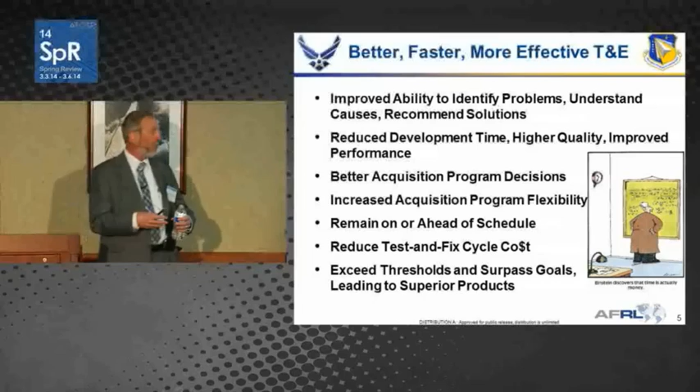The portfolio is mostly STTRs, and those are designed for tech transition. I do have a good number of lab tasks, but I have very little core university basic research money in the portfolio, and that is an organizational strategy. It's not my individual preference, but I think it's very effective for this portfolio.

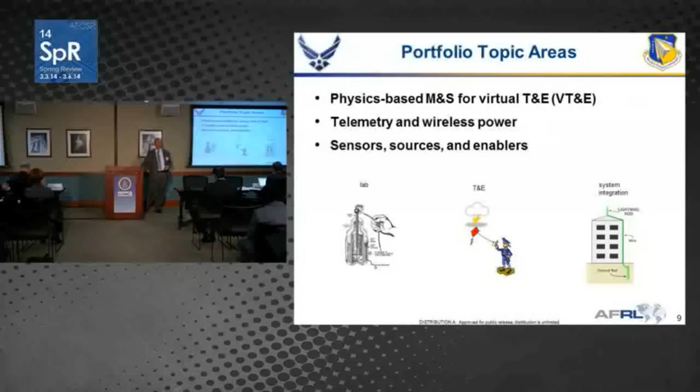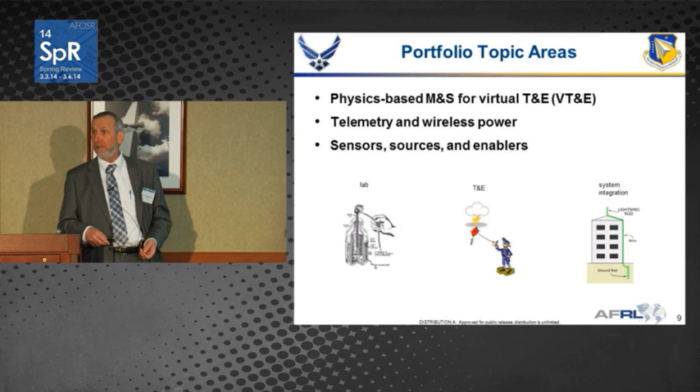Telemetry and wireless power is not a large area of investment, but it's a very important area. When we have for ground tests those big pieces of equipment, the test facilities being operated, that information needs to flow into a control room. We have safety issues and concerns - can the test proceed? If we take that into flight test, we have both the aircraft and the pilot safety that may be involved. So that information has to get from wherever the test is being conducted to a control room where they're making decisions in real time, and there's where the telemetry comes into play.

And this third area, sensors, sources, and enablers. Let me dissect that a little bit, because everyone knows what a sensor is, but I have two different types of sensors that affect my community. One is the sensor that is used for the test, but sometimes the product under development that comes in for testing also has sensors. In cases like that, those sensors sometimes come into the T&E facility to be calibrated, so I need calibration sources. Sometimes they come in for more complicated integrated testing, like hardware in the loop for, say, an infrared focal plane - I need a scene generator, and that's a source. I need to stimulate that sensor in the right way. And finally, the enabler. The enablers are kind of a catch-all, but as an example, the ultra-high performance concrete, that big block, it's not an instrument, it's not a model, but the test can't be conducted without it, and it's a critical part of that process.

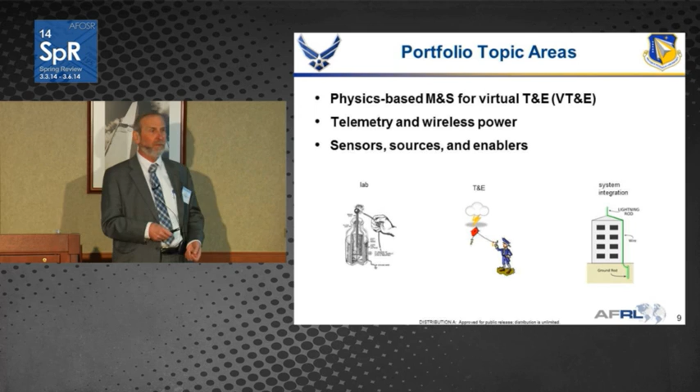Next slide. So in the area of physics-based modeling and simulation, current project areas - I'm going to highlight the virtual flight models that are under development, but there are several other areas here. I'll probably say a little bit about the high-performance computing, especially as it relates to computational fluid dynamics. Next slide.

Now, in the team building process, the PIs play a critical role, and here is a lot of the stuff that's happening in terms of the team constructions for the virtual flight software under development. It involves different people, different organizations, all working together. You'll see I also added some of the things I mentioned from the BAA that come into play: Summer Faculty Fellowship, the SMART program, and I'll show similar slides for the other two areas later. There are other minor parts that are extremely important for building up the T&E infrastructure for this program. I make use of all of these things.

Some of the work I'd like to highlight before I move on: this area is fairly broad because it involves different disciplines and different concerns, validation, different sources of test data, and different disciplines I could identify. I'd like to point out that in presentation and publication, all the people named here are publishing frequently in journals and going to conferences presenting their work. The research is not limited to just AFRL in this endeavor. All of the people are actively engaged in the research and in the publication process.

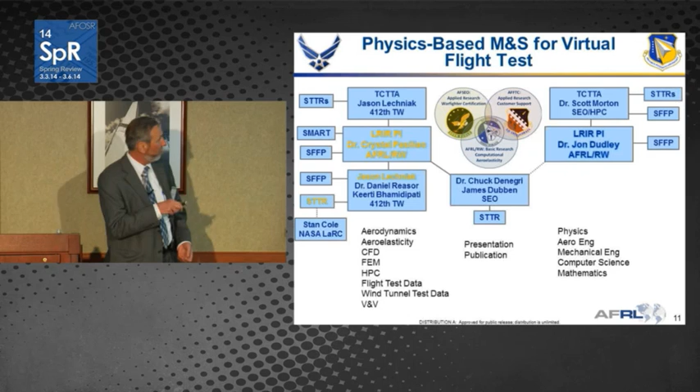In particular, Jason Lechniak, who works at Edwards, the test wing. Edwards has not only access to the flight data, but they have expertise in this area for model development. Jason is working as the tech transition advisor for Dr. Crystal Pasiliao at the Munitions Directorate, RW, at Eglin in this regard. I'll be saying more about this activity shortly.

Next slide. Okay, so here's what Dr. Pasiliao is working on. It's this complicated problem of flow interaction. It's a combination of a flexible aircraft structure that needs to be modeled, the flow around that structure, and how that structure interacts with that flow.

You'd think that this would be solved once and for all, but it's not, because when the aircraft is first designed, a prototype is put into testing, that's all nice and fine, and then someone says, oh, we're going to have all these external stores, and the aircraft gets into the fleet. Throughout its life cycle, these stores are being modified, so things change, and what we don't want to have happen is the airplanes flapping like that. Those things aren't supposed to happen, but it's because of this nonlinear interaction between a structure and a flow. It's a tough problem that she's working on.

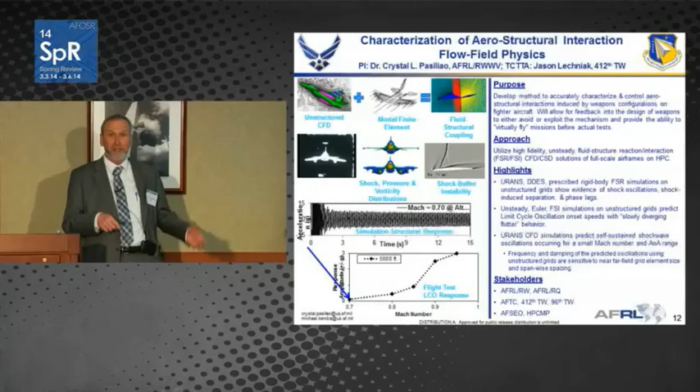Now, regarding the role, Jason and some of the people in the group he works in are actually getting some of that money to do the technical work. When we were talking about where else we need to invest, what new STTR topics, he said one of the problems we have is when we compare flight test data for something like this with what our best model gives us, we have differences we can't explain. We don't know whether those differences have to do with sensor placement and calibration, variations in local conditions like winds we don't know about, whether it's the finite element model that needs improvement for the structure, or the computational fluid dynamics model. We don't know what we need to tackle. All we know is that we have a discrepancy. And the flight data won't help us answer that.

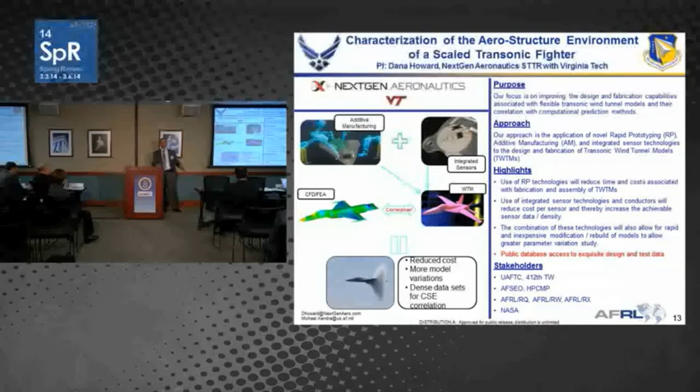Next slide. So we crafted a topic asking what we could do with phase 1, phase 2 STTR, and thought maybe we could take it into a wind tunnel test model construction, but bring in modern things like additive manufacturing and integrated sensors. The prize here is not the model, the prize is the data. We put in a requirement that any of the test data, including the design, be put into the public domain, so that people doing model development would have access to it, and the community would be served and the science would be advanced. Next slide.

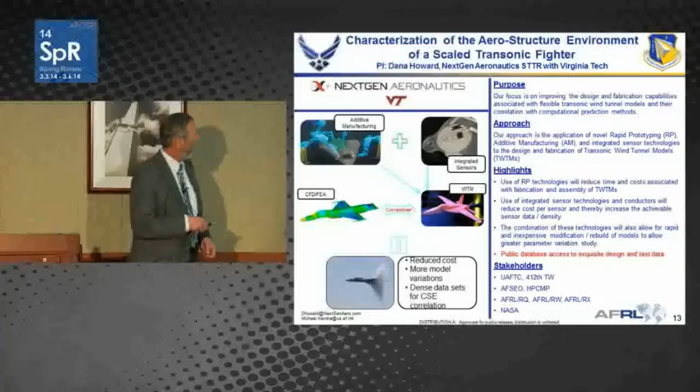Reduced order models—Doug Smith, when he was talking about flow and dynamics, said something very interesting. One of his PIs came up with a formulation where the computational complexity was greatly reduced. There was a simpler way to get at the answer that didn't require those resources. That's what the reduced order model paradigm is. So we're investing in that area as well.

Computational efficiency. We can build bigger supercomputers, faster supercomputers, better supercomputers, but it's expensive. Some of the performance bottlenecks are with algorithms developed for old hardware, 10, 15, 20 years ago—what we may call legacy code, but they're still in use. We need to identify those bottlenecks and get better performance by finding ways of removing or reducing those issues.

So we have STTR Phase 2, we actually did 2 awards here. This one specifically looks at the algorithm portion.

Each of these 2 areas of investigation, we're seeing not small percentages—we're seeing the potential for speedup by a factor of 5 to 10 in some cases. So this is a big deal for the computational people to get those tools working efficiently and keep them working efficiently.

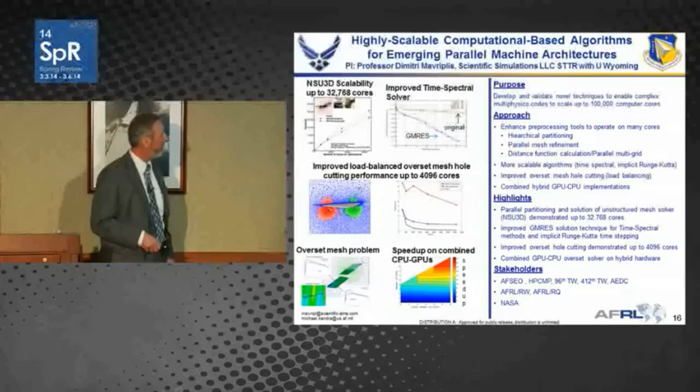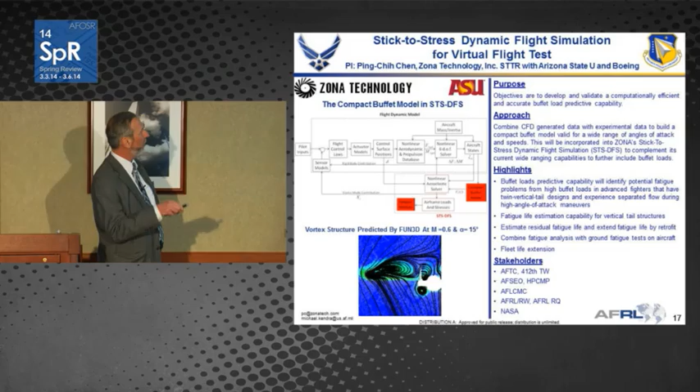Virtual flight test—we have 2 Phase 2 awards in this area, and for very good reason, the same topic. This one looks at the interaction of the control system and is developing that aspect of flight test modeling.

And the second award is looking at the reduced order models for virtual flight test. How can we come to the computational solutions quickly and efficiently?

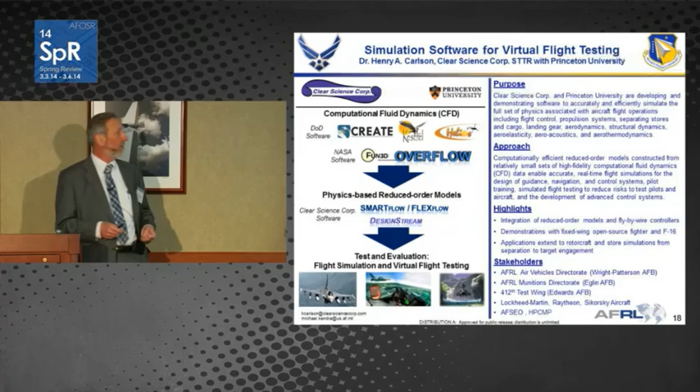This is a lab task out of the Sensors Directorate, maybe a little bit looking further down the road for hypersonics. What happens with the transmission of electromagnetic radiation through a boundary layer and plasma? And we're not just looking at RF, we're looking at optical signals and anything related to that. And that is Dr. Saba Mudaliar working with Dr. Charles Jones at Edwards.

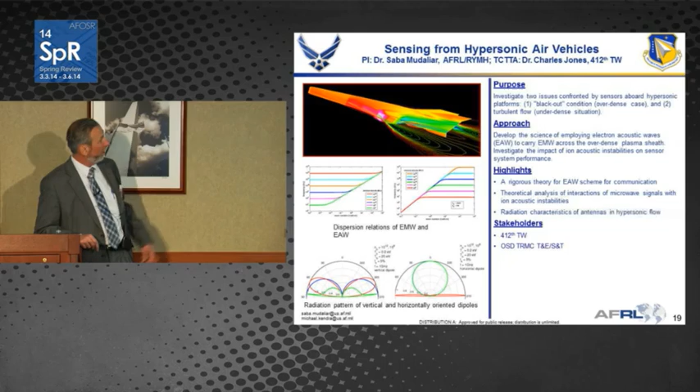A related topic, weakly ionized plasmas—this is a Phase 2 STTR that has just come to completion.

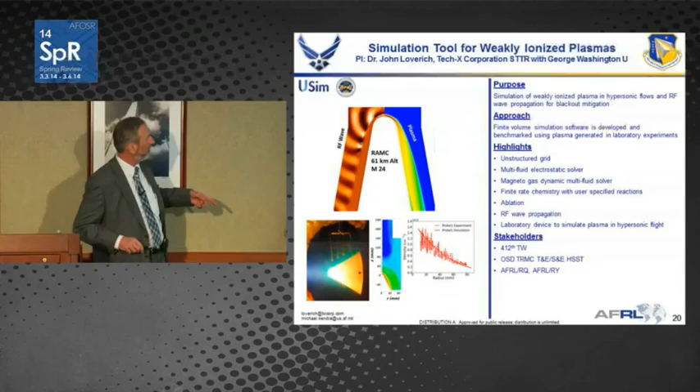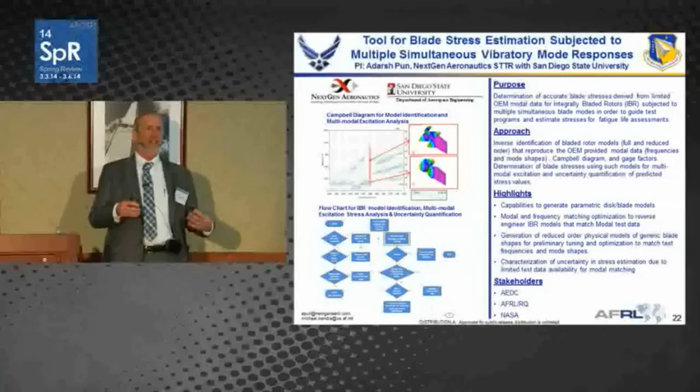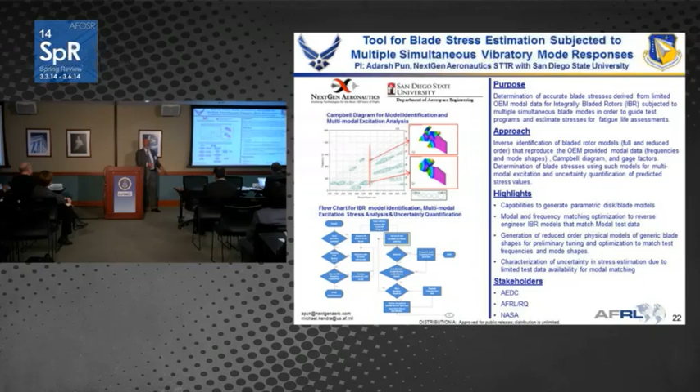Turbine blade mistuning—I'll only say this is potentially a safety thing. The test community doesn't always get manufacturer's data because it's proprietary or it costs a lot. And when they get something in to test and things just aren't right, when we get into these multiple blade resonances and the testers aren't sure what to do about it, and whether they can proceed or not, we need to have the models that will answer those questions so that we can conduct the test safely.

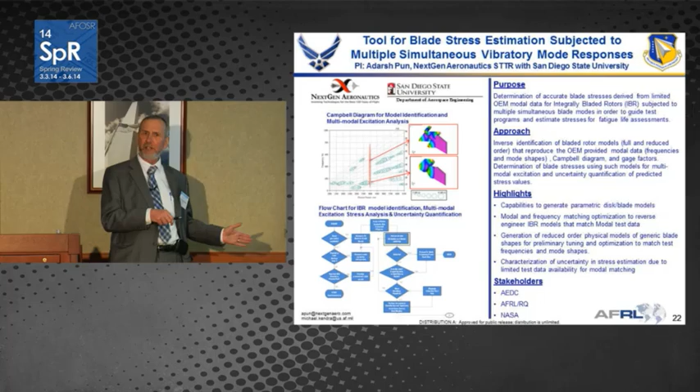Same topic, we had 2 Phase 1 awards.

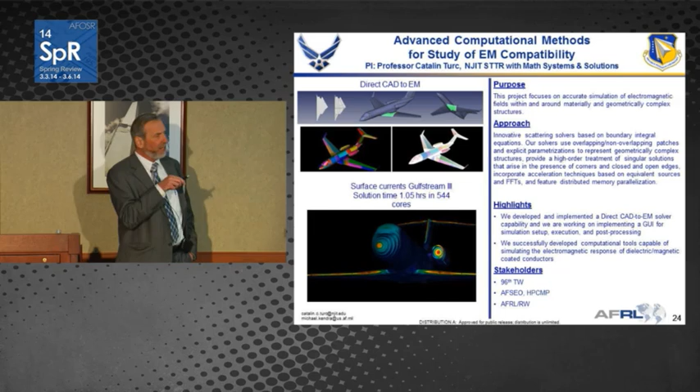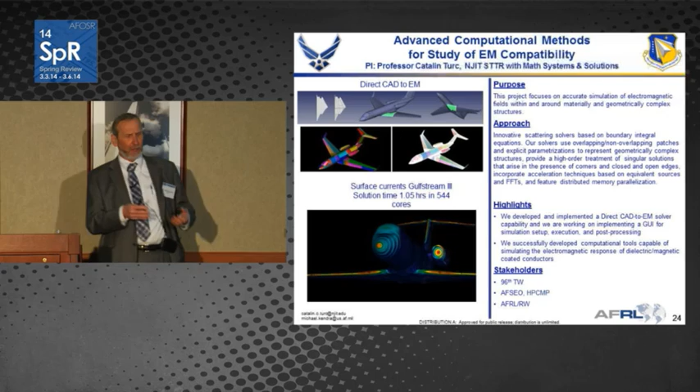Electromagnetic compatibility. This was a topic of great interest to the folks at Seek Eagle office that are looking at the safety of the electronics involved in weapon systems. When we have RF emitters and they enter, for instance, an engine cavity, they won't necessarily be attenuated—they'll reflect, and sometimes there can be positive reinforcement and multiple reflections, and those signals in the wrong place will cause induced currents. And if that happens with a circuit board, especially one that may control ammunition, will that circuit board fail? Will it prematurely activate? That's the kind of problem we're trying to address with this topic.

And it's modeling—some very elegant, outstanding work is being done in this area.

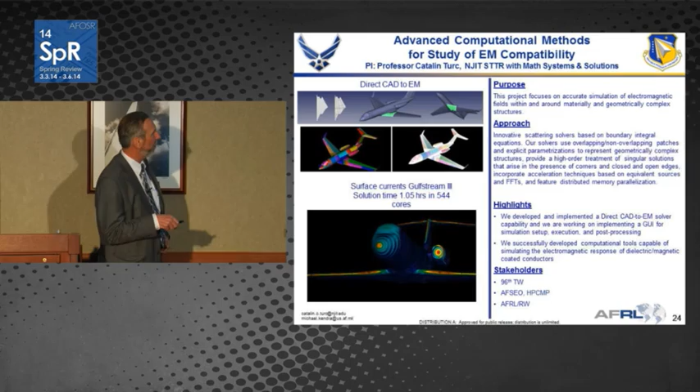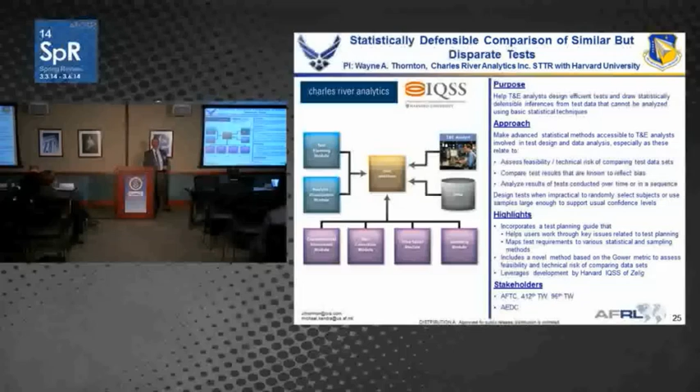Comparing test results isn't really a modeling problem, but it's one the test community faces after an aircraft is developed and goes into operation, since it changes and evolves over time. But this is the most comprehensive data they have on aircraft performance. So operational people come back to the testers and ask, if I do this, will that be okay? The test community, because they control the data, is asked to provide answers for a different aircraft than the prototype that was tested. It's very important to them.

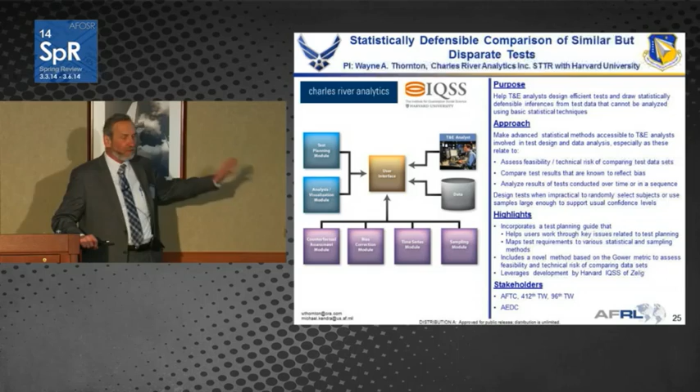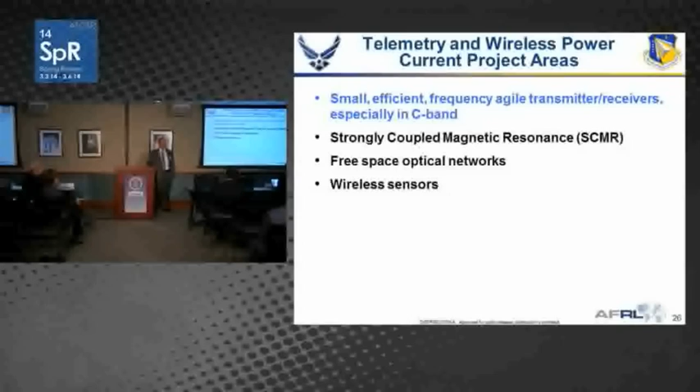Let me move on to wireless power, C-band telemetry in particular. The big thing is that the U.S. is selling off bandwidth to commercial interests, which is constraining what can be done with telemetry and some of the ranges. So they're turning to C-band, but C-band is not a developed commercial product like fobs, remotes, cell phones, or Bluetooth. There's a lot of investment needed in this area.

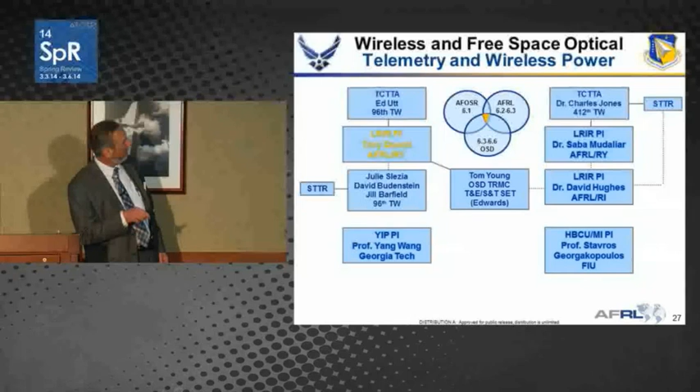It's not as big an area, but here are some of the working relationships, the teaming, and I'd like to point out the work being done by Tony Quach. Tony's at the Sensors Directorate, and he has a team looking at gallium arsenide.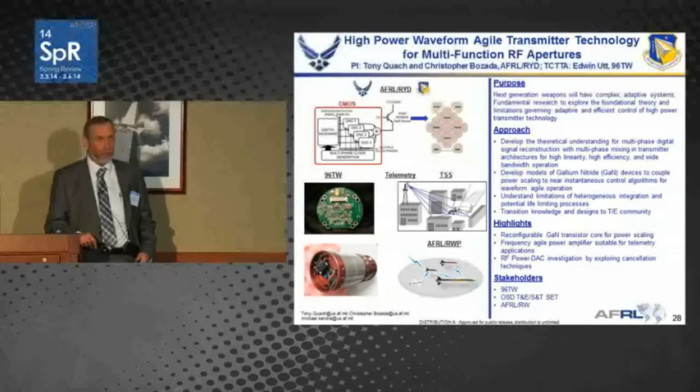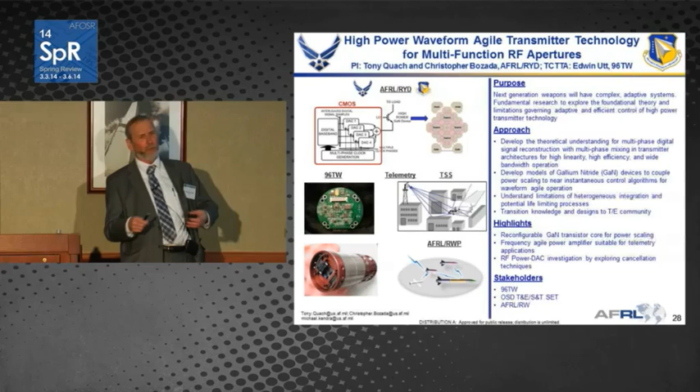They're developing power amplifiers, that's been the first part of it, using that to have something configurable, where I don't have to build another for this purpose or that purpose, where I can have a great deal of control over how it functions, so I can make a lot of them, put them out, and let users determine how they need to use it and adjust it. He's just filed a patent for some of this work.

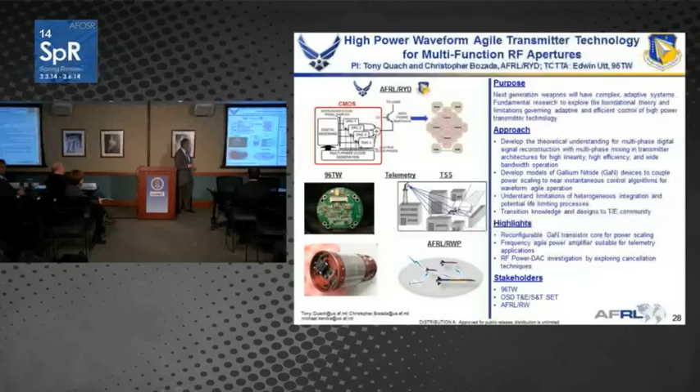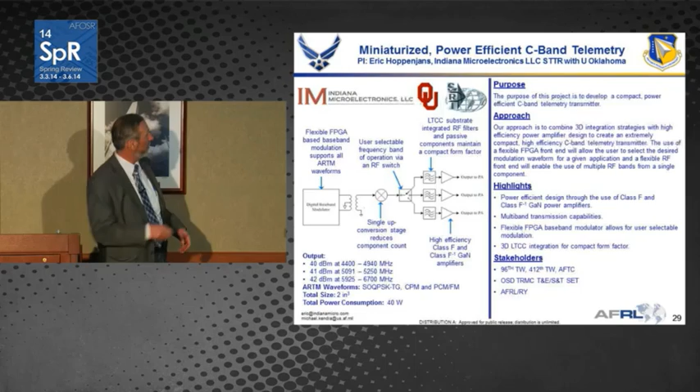This is a different problem with C-band when we get into munitions. Munitions have size requirements - they're small, so it needs to fit into something much smaller if we want to do telemetry during the test. In this case, they've added a constraint of less than 2 cubic inches.

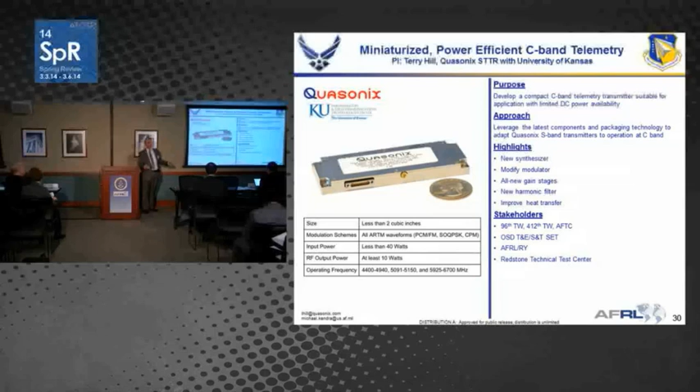So we have STTR to do the tech transfer. This looks like it's going to be a real winner. It looks like at the end of phase 2 they're actually going to have a product ready for delivery, several prototypes, and be ready to commercialize.

Wireless power transmission - I talked about this last year, so I'm not going to delve into it. At Florida International University, some work is being done on strongly coupled magnetic resonance, where we can transmit power over short distances, maybe 50 to 70% efficiency. In the second year, Professor Georgakopoulos is looking at reducing the size to microcircuit or micro devices.

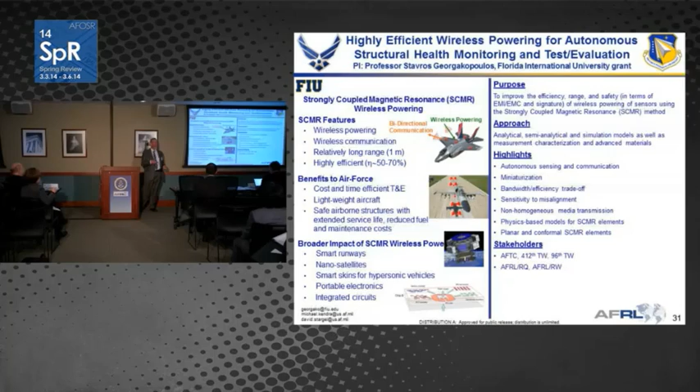The key thing for the test community is not the sensor, but the complexity of the wiring involved, the placement in the wiring. If we can do things like this, it greatly reduces that complexity, and they're very interested in this work. And finally, wireless sensors are under development.

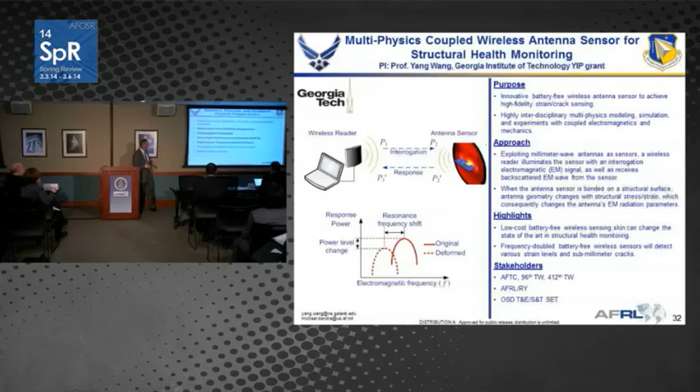Last area is instruments, sources, and enablers. I have a few things to highlight here, and I still have a few minutes to talk. Some of the instrument development has to do with pressure, flow, ablation, and so on. The nanoscale diagnostics I already talked about.

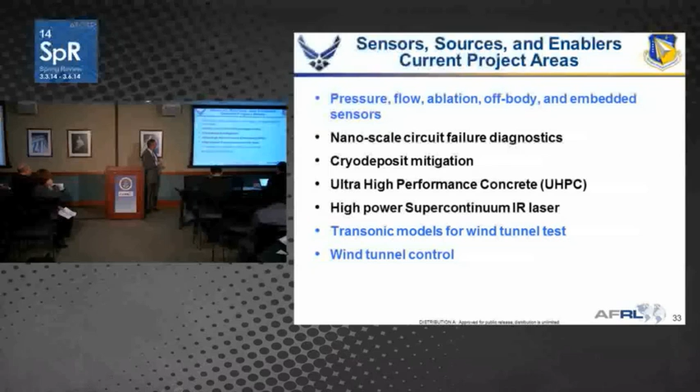Cryodeposit mitigation - in the space test chambers, they're cold under high vacuum, but if they ice up on the optics, when the optical components come in for calibration, they have to warm things back up again. Sometimes they have to break vacuum. It's a big problem when that happens, and I've got a slide I'll talk about in greater detail. The wind tunnel model I've talked about, so let's go on to the next slide.

I'll try to use my time wisely here. Some of the relationships - I'd like to point out this is the first time that DURIPs have shown up. It's the infrastructure to bring world-class equipment into university laboratories that we purchase but are in the interest of the Air Force because they're funded projects in the portfolio.

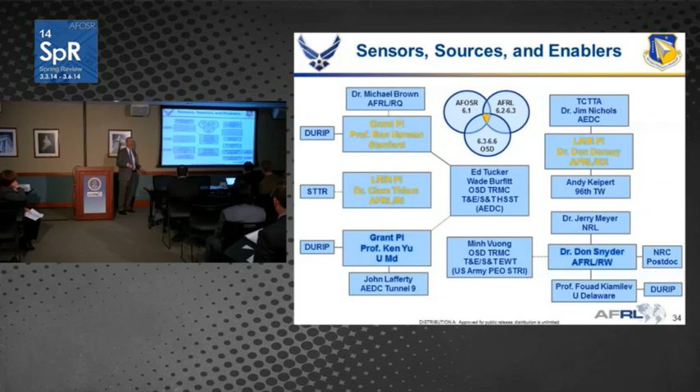We now have several DURIPs under consideration. I don't think they've been awarded or we've heard an announcement yet. But 3 of the PIs are functioning in, I think, some pretty well-developed teams. I have another PI over here who is not being funded through me, and that will happen from time to time. Those collaborations are important.

Neuromorphic computing, and I heard the term earlier, non-traditional or non-conventional computing. This neuromorphic computing is about a mix of analog with digital circuits, but at the logic level. These things are being built at foundries, and the team at the Information Directorate, headed by Clare Thiem, is putting together these things on a massive scale where tens of thousands of neurons are interlaced with the computers. But they also have these things being done on the individual chip level, what I will call a solid-state neural device, and that is leading to maybe some really interesting development.

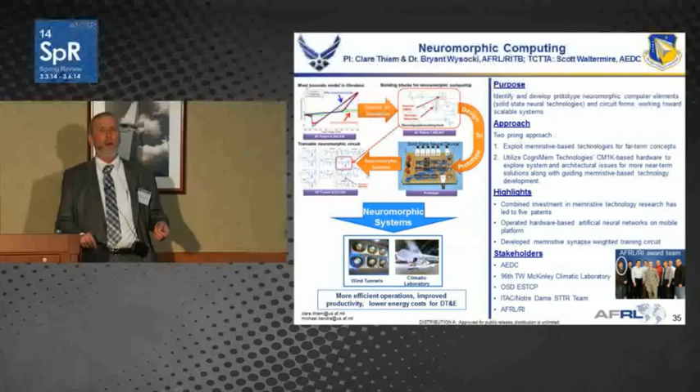The team, we have a photograph of them over here. They just received an annual RI Team Award for this work. They received the individual award, Dr. Wysocki, and that went up to AFRL corporate, and it was just announced he won at the corporate level. In addition to the outstanding work this team has done, I'm really glad they're getting recognition from the organization.

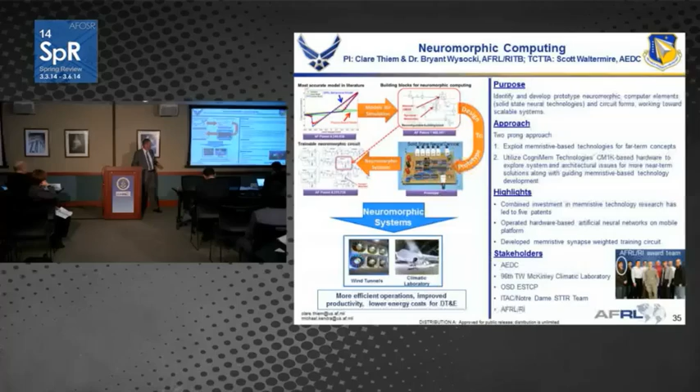So this solid-state neural device, I've got a couple pictures here. What might we do with it? Why might it be important to the test community? We have a wind tunnel control system based on a neural net design. This was installed at the University of Notre Dame wind tunnel successfully, and now the two teams are collaborating, and at the Information Directorate they hope to train one of these neural nets on a chip to provide the same function. Because the control systems for some of these big facilities are old and don't get upgraded very often, we see a lot of potential to take them into not just wind tunnels, but other things that involve heat exchangers and flow.

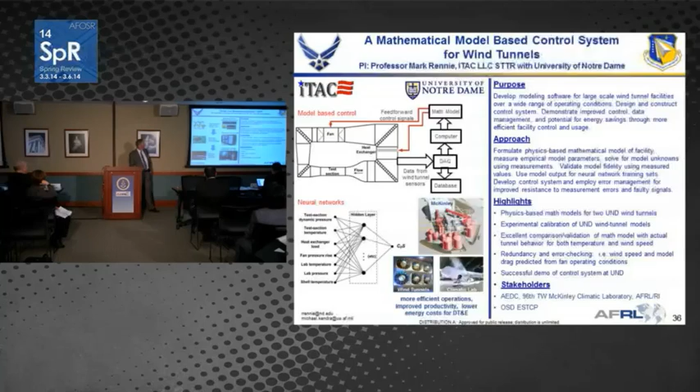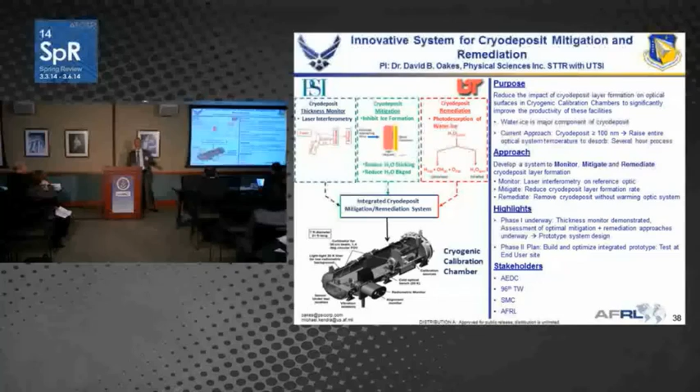Cryodeposit mitigation, I said I'd mention that briefly. Three components: we need to be able to measure the cryodeposit, so there's a monitor under development. We'd like to be able to mitigate it, though we don't think we're probably going to do much in that area. And finally, remediation - can we remove the ice? Now that we know it's there and where it is, can we remove it without having to warm things up and break vacuum?

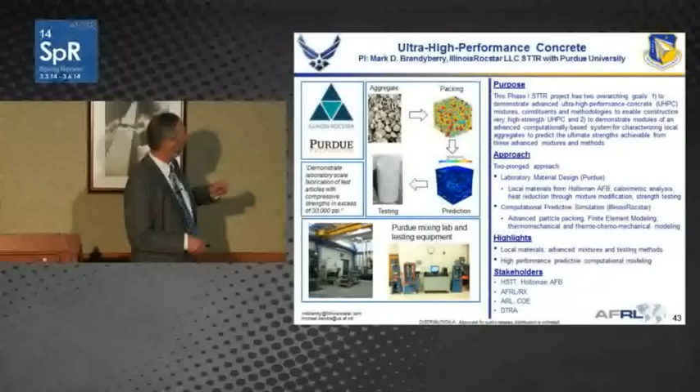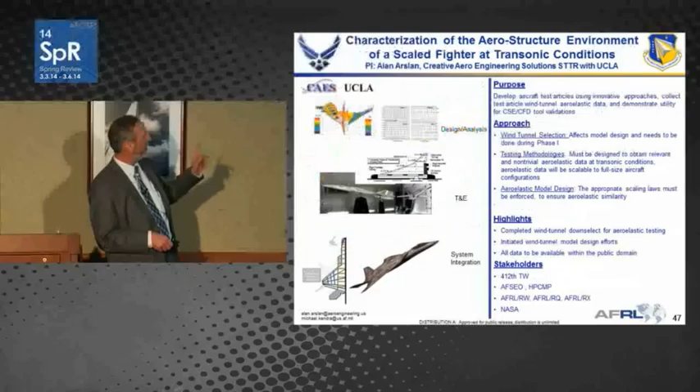I'm done, but before I finish, I still have a minute. Because the portfolio has this constant turnover through the STTR process, I wanted to make sure you were aware of some new awards - this is already in the portfolio, and 6 new topics we're really excited about.

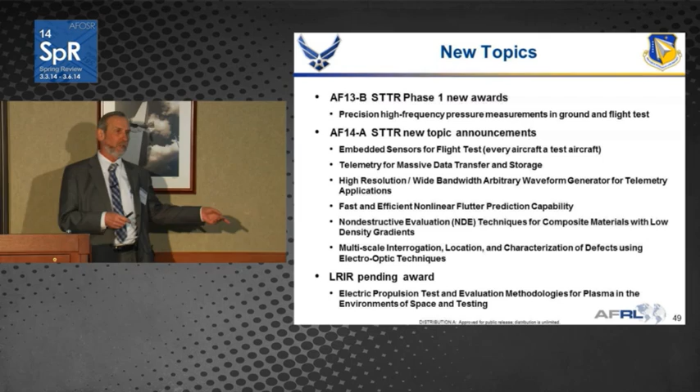And I'm done. Thank you, and I have 20 seconds.

Do I have 15 seconds for questions? 15 seconds for questions. No questions during the transition? We have one question while we transition.

Yes, I was wondering if you could share some of these techniques for removing the ice, or would it be best just to visit those charts later? How about during the break? Yeah, I think during the break I'll be glad to discuss those with you, so I can send you copies of reports.